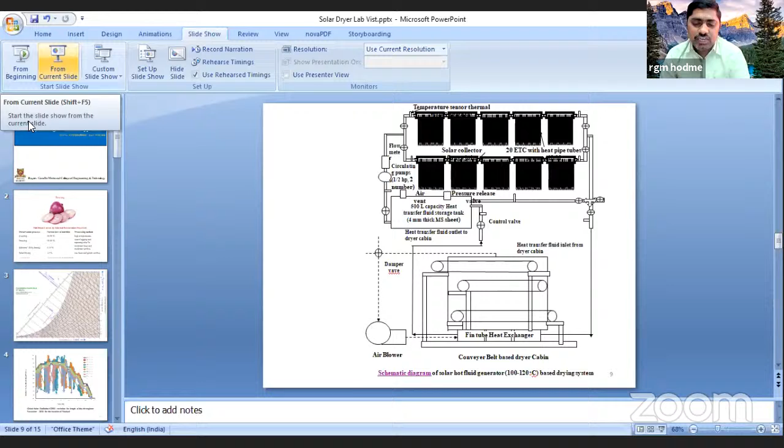I think this week I am coming fourth time. Last time we discussed sustainable development through renewable energy intervention, and one successfully implemented project. That project's virtual visit we planned today. Last Friday we did the virtual visit of our soya milk plant, and I think you enjoyed seeing it from seed to the cake. Today we will get the same experience, for the solar hot fluid generator based dryer for agro industrial application purpose.

I already explained this, but just brushing up before the virtual visit: what is the purpose of drying? We are removing the moisture for long-term storage. For long-term storage, we use two types of methods: one is cold storage, and the second is removal of moisture to reduce enzyme and bacterial activity.

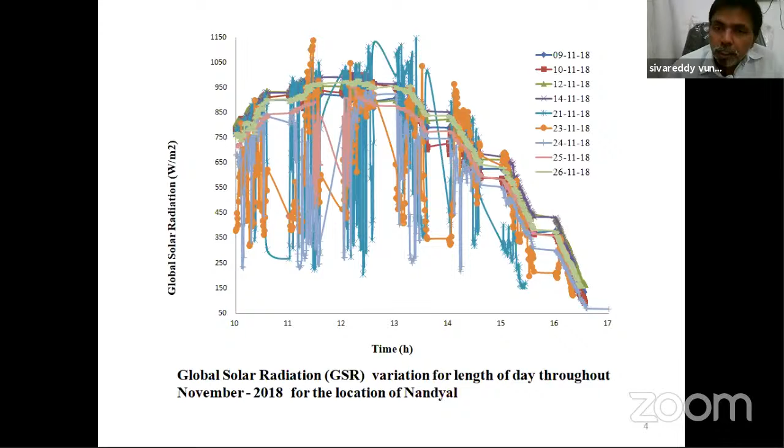In solar drying, in olden days—maybe the last 2000 years—we did only open sun drying, like drying chilies, dal, and paddy in open sun. But the drawback of open sun drying is the uncertainty of solar radiation, and it takes more time. Perishable goods can't be open sun dried—doing so causes color change and reduces product quality. For that, automatic drying is required. You can see these are the solar radiations.

For this, we developed and proposed one solar dryer. Here, three things we did. We separated the solar thermal unit separately, using ETC with heat pipe, so we used a separate industrial solar heating system total.

By ETC with heat pipe, we are heating the thermal oil, meaning the heat transfer fluid. The storage capacity we maintained is 500 liter storage capacity. So this is one cycle.

It is not linked with the dryer. Even though the dryer is not working, from early morning onwards we can store the solar energy. Next, whatever energy we are storing, that energy is used according to the need of the dryer.

Initial conditions require high airflow rate and low moisture air. At that time, the mass flow rate of the air can be increased by increasing the blower speed, and automatically the surface moisture is immediately removed in the dryer cabin.

You can see we selected a conveyor belt dryer cabin, not box type or cabin type dryer cabins, because this is a full-fledged industrial model. I will visualize that one later.

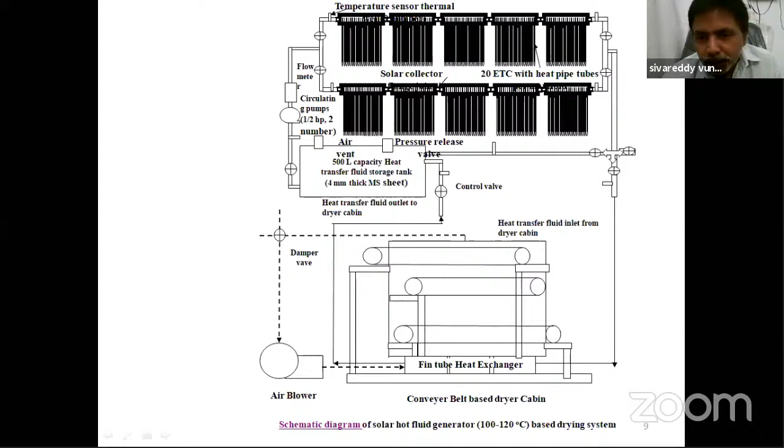Sir, are you playing the video? Video is not visible, sir. For you or all? I think for all. No sir, it is visualized, but it is not the shared video. Sir, it is clearly visible. Actually, I am also unable to see the video. The speakers are getting a problem. One minute. Now? I think participants are getting it or not. Yes sir, it is live, share mode only. Any participant respond - is the video visualized or not? Sir, it is clearly visible and audible. Okay, thank you, thank you. Video also, it's visible and audible. Sir, again you log in. No sir, no videos there - only that conveyor belt based dryer cabin paper, no videos there, only a schematic diagram of solar, that schematic diagram only is showing. Again I will share, one minute. You share the video, sir.

Now? Yeah, now it is okay. Yes, yes. Okay.

So this is the ETC. The two collectors were connected by the flange joint with neoprene rubber insulator. This is the tube. We are immersed in the glass tube. I think from starting again I will show what is heat pipe later. Otherwise, now this is the heat pipe. Heat pipe top portion is condenser. Total 1.8 meter length is the evaporator.

You can see. He will show. This is the heat pipe. Each ETC tube we immersed this heat pipe. This condenser portion is in the manifold, remaining in the ETC tube. I will show the ETC tubes now. This is the tube inner view. You can see two glass tubes we evacuated for increasing the absorbability.

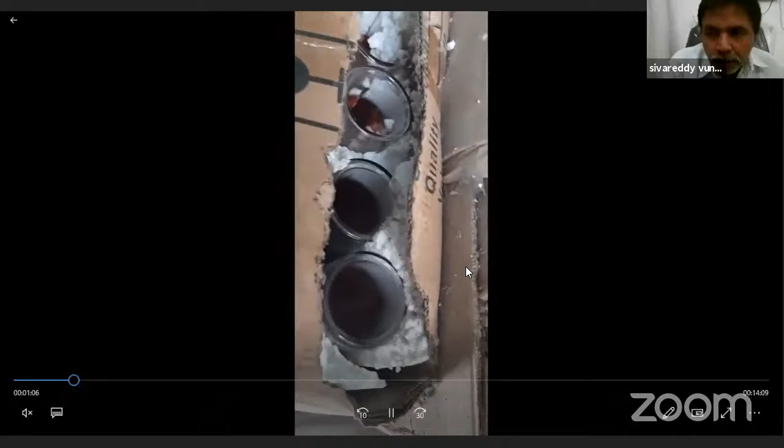Main advantage of heat pipe is to enhance the heat transfer at lower temperature difference also. That's why with the ETC tube itself, we are achieving more than 100 degrees temperature. Mediator is not water. Water at 100 means it will generate steam. Thermal oil we are using.

Now you see the structure. SS structure we are using, SS 304. Here also ground grouting we did for stability of the structure. You can see the foundation bolts for effective structural support. This is the manifold outlet.

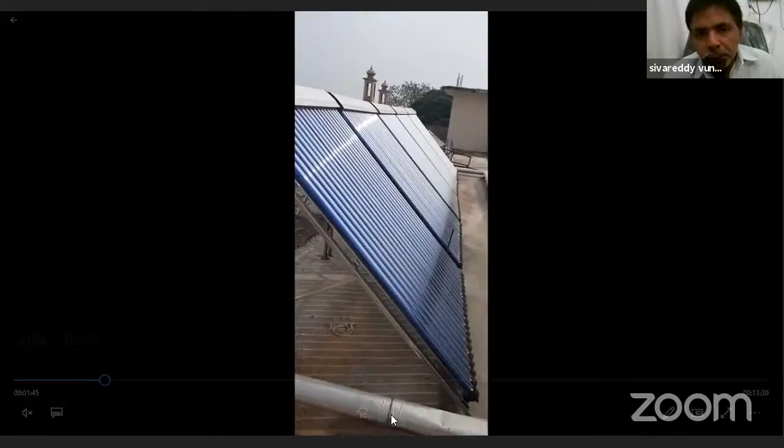Now you see this is the view of the ETC with heat pipe collectors. These are the 5 collectors. Each collector contains 20 tubes. Each tube length is 1.8 meter. Total area of the collector is 3.2 meters square. Like this, 5 collectors are connecting.

In the manifold, the heat pipe condenser part is there. Through the manifold only, heat transfer fluid is transferring. Each collector we joined by the flange joints. Everywhere we are using neoprene rubber. Why? Because neoprene rubber temperature resistance is more than 150 degrees. So best sealing effect we can achieve. This is the inlet of the collector. From the storage tank, we are getting the inlet.

This is one more view, one more development of solar wastewater evaporator. These are the remaining 5 collectors. So total 10 collectors. Each collector area is 3.2 meters square. So total 32 meters square area of solar collector is installed for drying of 200 kgs loading capacity dryer. Maximum capacity is 200 kgs.

So only through the manifold heat transfer fluid is transferring, nothing else. Remaining area only heat pipes are there. If due to the monkeys or any wind loads any collector is failed, there is no leakage, only temperature drop will take place. So this is the inlet pipe. You can see the deep visualization of the flange joint. You can see here we are immersing ETC tube.

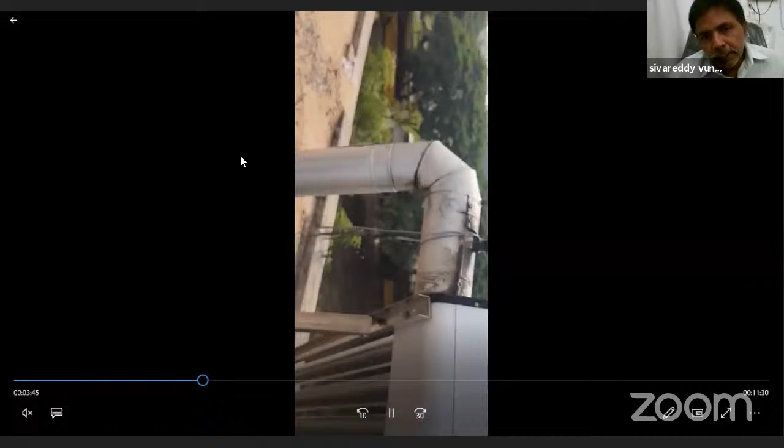This is the entire insulated manifold. Glass wool insulation we are using because high temperature is there. You see shading effect is coming. So this is the inlet pipe. For 2 collectors a single T-joint inlet we have given. This is the outlet of 2 collectors. This is from the inlet. So this is the outlet, one control valve we mentioned.

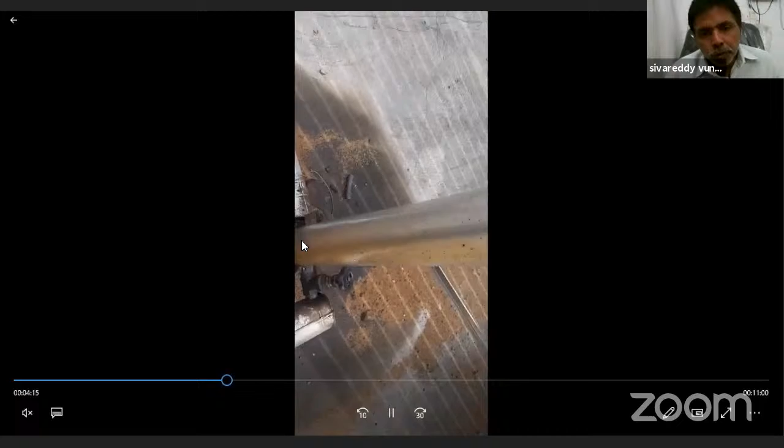If solar radiation is coming, and we want to directly utilize it, then we will open this valve. All valves are gate valves only. If I open this valve, it will directly go to the solar dryer unit. Solar dryer unit is available downstairs.

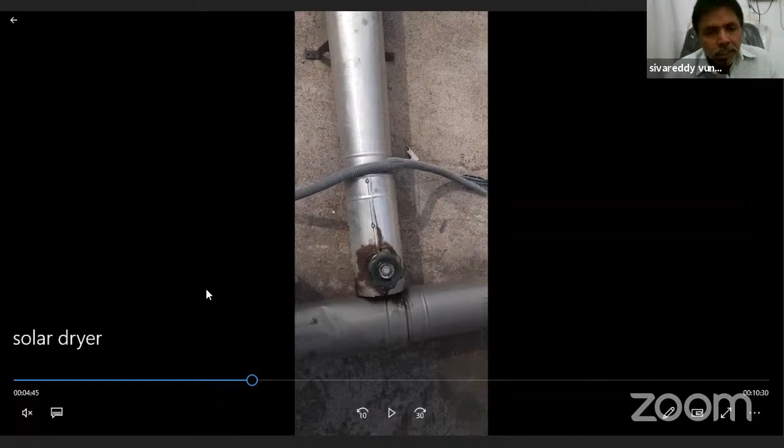If solar radiation is not available, then I will close the inlet valves of the collectors. Two collector inlet valves are there, I will close. Then whatever hot fluid is available in the tank will directly go to the solar dryer cabin. So when solar radiation is not available, my system will also run. This directly enters into the solar dryer unit.

Otherwise, if downstairs the requirement of heat is not available, then I will open this valve. I will close the solar dryer inlet valve. I will open this valve. Automatically, it will come to the storage tank. So three ways of connection by the gate valves we arranged.

So this is the inlet. Our second inlet is there. This is the flow rate measuring instrument. This is the outlet. One flow meter is there. If any problem is there with flow, I want to replace the flow meter, so two valves I connected. I will close the two valves and I will replace the flow meter if any damage is taking place.

This is the storage tank area, you can see. And these two circulating pumps are connected. One is standby, because if one pump fails, our system has to run. That's why we kept two circulating pumps. A common inlet and a separate inlet for each pump is there. Whichever pump I want to use, I will open that inlet valve. The other inlet valve I will close.

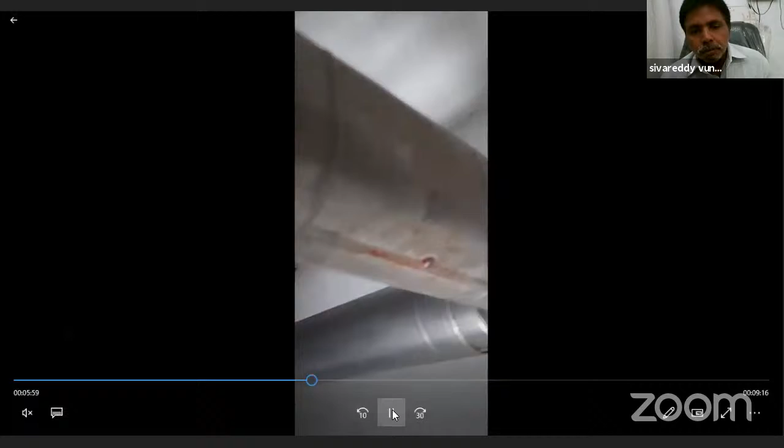You can see here two inlets are there, one outlet. One inlet is coming directly from the collector. Another inlet is from the dryer cabin, where recirculated heat transfer fluid is coming. So the storage tank contains two inlets and one outlet. So with one circulating pump, we are capable of doing all three operations.

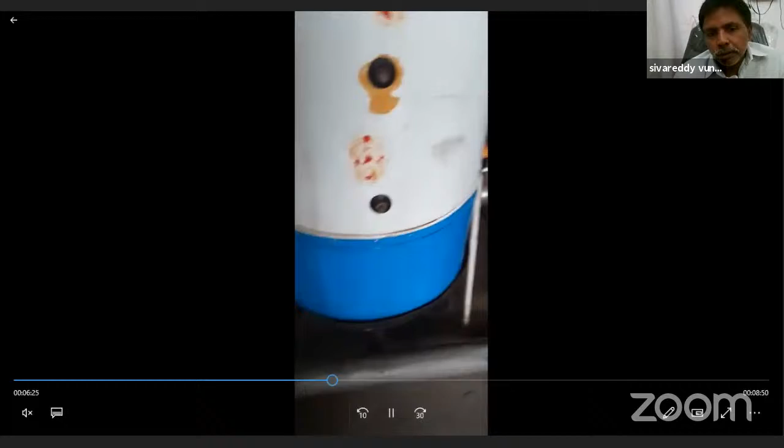This is the inlet from the dryer cabin, whatever inlet is coming. Inlet we kept at the top, outlet we kept at the bottom. This is a common criterion. There is no special principle.

Then this is the control board for running the blower, temperature measurement and circulating pumps. And for the blower, a variable drive blower we connected, so we can increase the blower speed. Now the blower is running, so you can see the suction. This is the outlet of the blower. From the blower, air is circulating inside the dryer cabin. Again from the dryer cabin we will get the same air, or by using the damper arrangement, fresh air also we can get. I will show the damper arrangement.

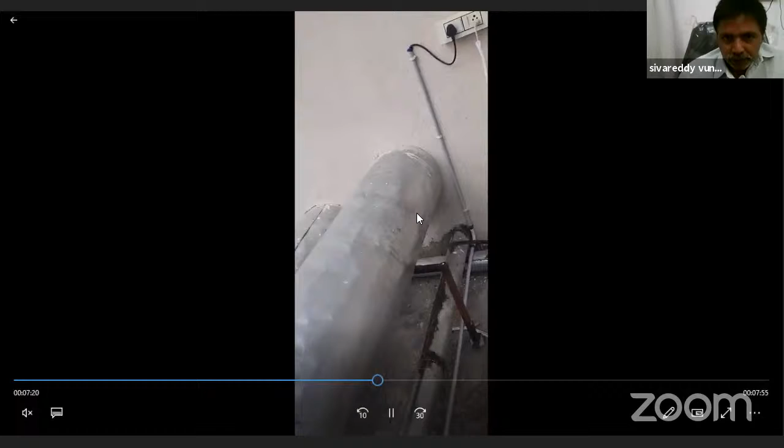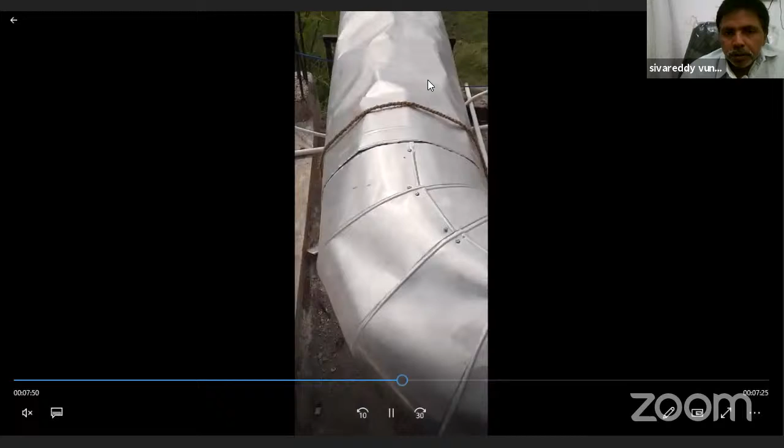Yes, this is the outlet of the blower. This is the inlet of the blower. Two things. So from this blower outlet, this duct is directly entering into the dryer cabin. The dryer cabin I will show; it is on the first floor. From the dryer cabin, we are getting the outlet.

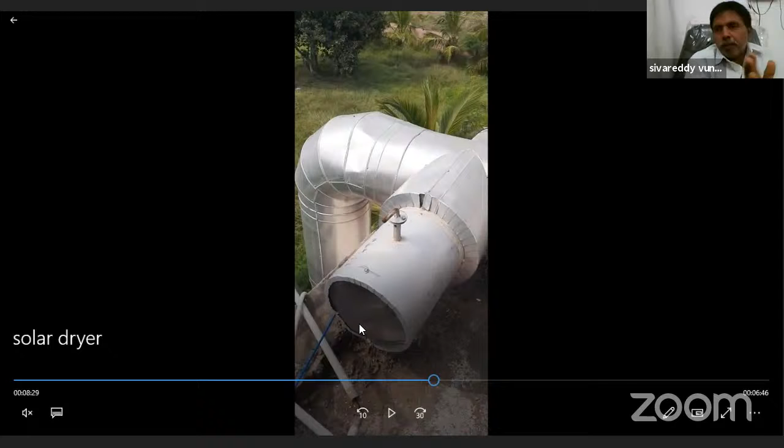This is the dryer cabin outlet. If the relative humidity is high, you can see, I will open this damper and automatically the exhaust air will go to the ambient. If the relative humidity is low, less than 60%, then I will close this damper and I will open the intermediate damper. The same air I can recirculate.

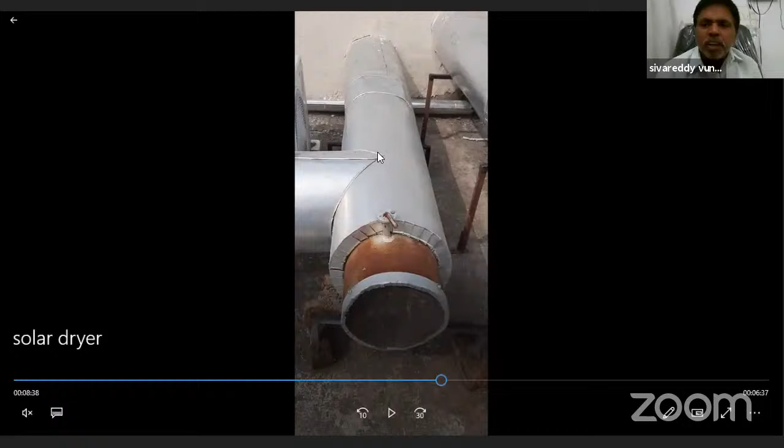This is the inlet. I will close this inlet damper. If I want to substitute some fresh air, I will partially open this inlet damper. So some fresh air will also enter into the dryer cabin. Already used air we can also recirculate. That means effective utilization of heat energy.

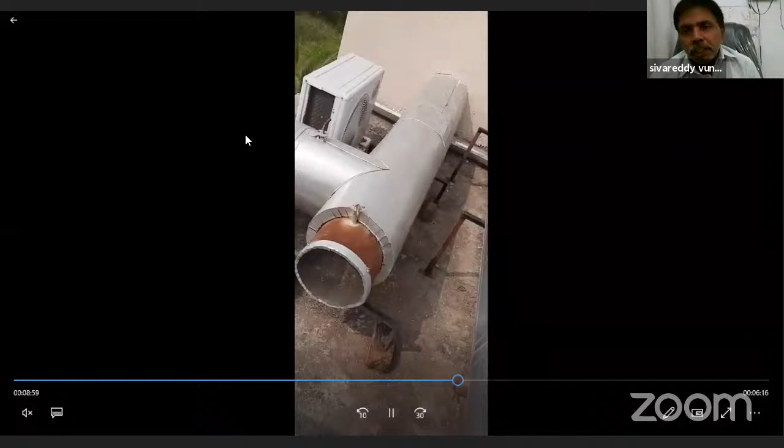So due to the damper opening and closing conditions, I can use three-way systems. If relative humidity is low, I will use recycling of the air; or if I want to substitute some fresh air, I will use partial opening of the inlet damper; or in the initial condition, when the relative humidity of the air is high, I will release the total air to the ambient, and every time I will take a fresh charge.

So for circulating the fluids, three methods we used. For circulating the air also we used them. Because of this separation, we are storing more energy. The efficiency of the system is enhanced, and the drying time of the solar dryer in non-solar hours is also increased.

Now coming to the dryer cabin section, this is the inlet duct. It is connected. Hot fluid is entering into the dryer cabin. In the dryer cabin, on the downside, we connected radiators. I will show you. Three radiators we connected. So the inlet duct is there. Three inlets we arranged. Why? Because we are using three radiators. I will show the radiators.

You can see, yes, these are the three radiators. In the radiators we are circulating hot fluid, and air flowing through the fins will gain the heat. For visualizing how drying is taking place in the dryer cabin, we also arranged one glass window.

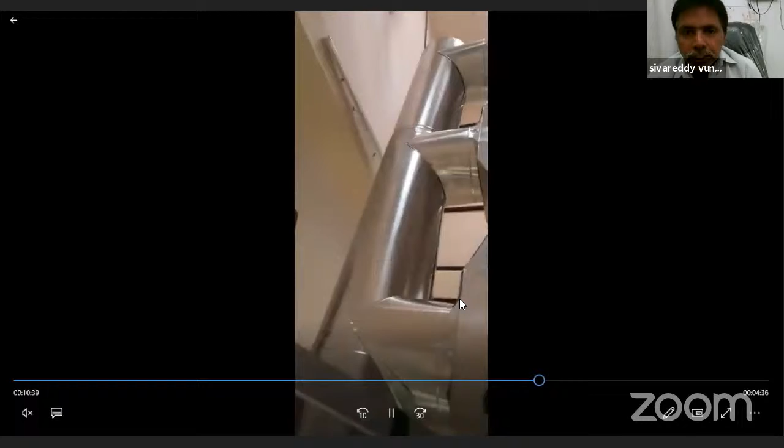Now on this side you can see the inlet duct coming from the top floor. For each dryer cabin, this is the outlet duct. The outlet duct again goes to the blower inlet. From here we are doing the loading. This is a 3-layer conveyor belt dryer.

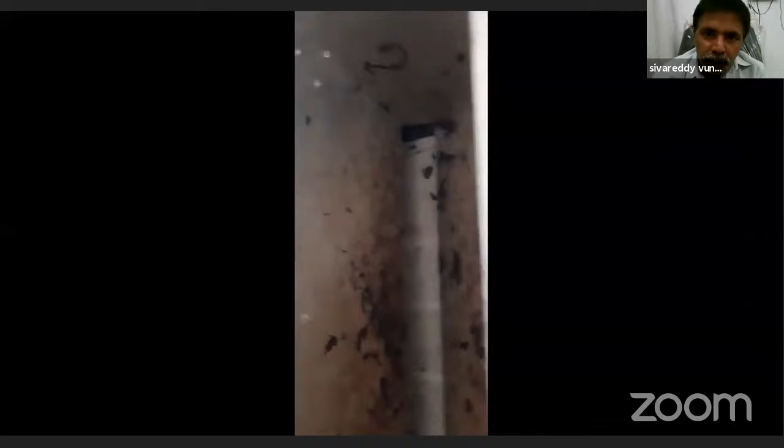Recently we did onion drying. Our employees did not clean properly. The leftover onion is melted. You can see the leftover onion, whatever is there. With continuous operation of the system, it is melted.

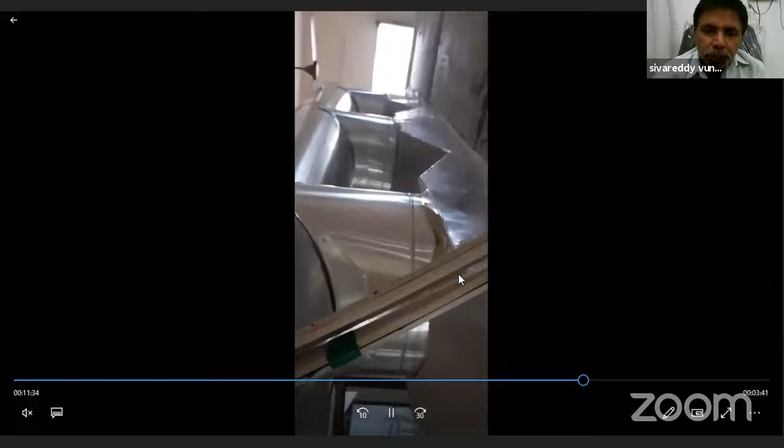For measurement of the temperatures and flow rates, the sensor connection is there. The instrumentation I will explain later. Today I am only explaining the dryer unit. This is my lab. The outlet of the hot fluid again enters at the top side. One is inlet, one is outlet.

You can see, inside my lab I directly placed this one. Everything we connected. Because we will not get special areas in an education institute. That is the main problem. Area is the most precious thing for an education institute. So whatever was available in my lab, I utilized to the maximum percentage.

This is the outlet. At the top side we are doing the inlet. The conveyor belt has 3 layers. Finally the third layer will get the outlet. The movement of the belt is taking place. You can visualize this one. The movement of the conveyor belt.

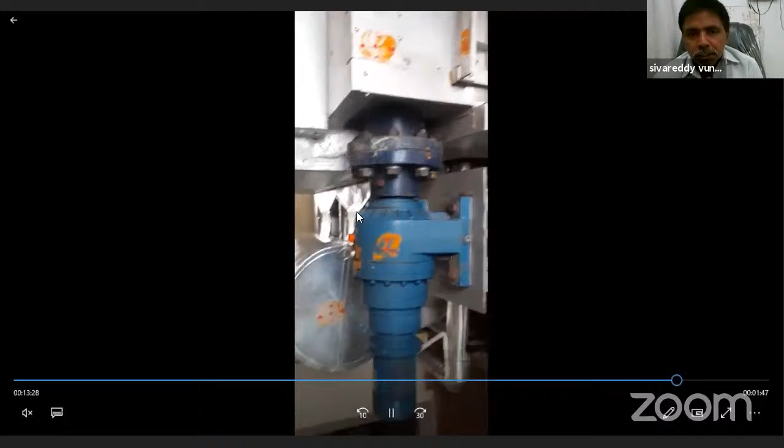And for washing of the agriculture produce before drying, this is the washing area. A separate washing area is also placed. Now my supporting staff suggested you can visualize it from the top view also. Once again, you can see the movement of the conveyor belt taking place.

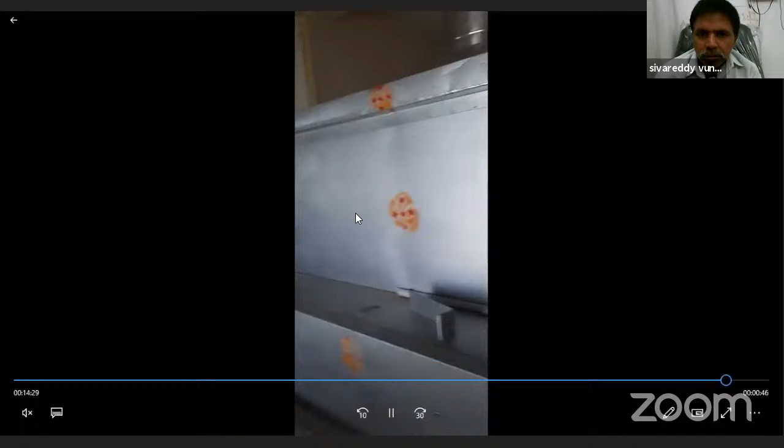This white jolly cloth, cotton cloth, we used because that is a metal conveyor. From the side angle also, you can see the movement of the conveyor belt. Yes, you can see. This is the conveyor belt system.

Total movement from top load to down load will take 2 hours time. So the first drying, the entire surface drying, 50% of the moisture we can remove in one rotation. In the second loading, we will stop the conveyor belt after full load, and for at least 1 hour we recirculate the hot air. Later again, we will remove the surface moisture.

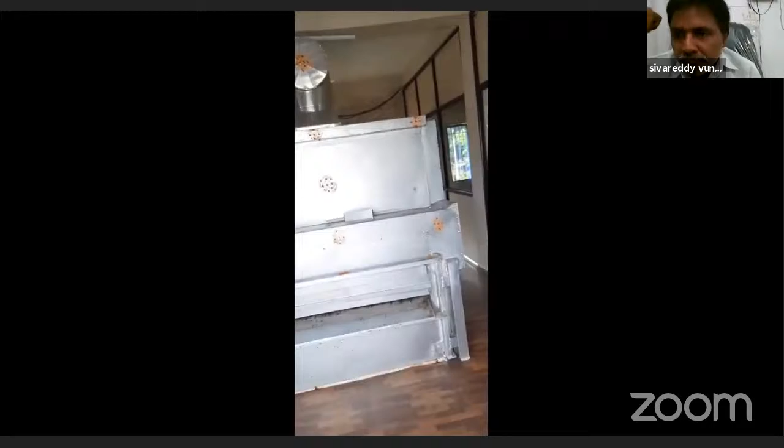For drying of onion and tomato, it is taking at least 7 hours time. For leafy products, in the first batch, first round, meaning within 2 hours, full-fledged drying is taking place. I think this is clear. This is the virtual lab visit of the system. I think you people have somewhat visualized it.

I already showed some onions. This is the dryer cabin drying. Temperatures inside the dryer cabin we achieved according to our need. Based on the product, we have to change the inside temperatures. For onion, for effective drying, if we kept the onion directly, even after 3 days it will not dry.

We have to increase the surface area. To create the capillary action, we can't create it at 2 feet depth. Only at a small depth can we create the capillary action by the movement of hot air on the surface. So for that, we separately purchased an onion slicing machine for drying of the onion. After drying, we also showed the cost economics.

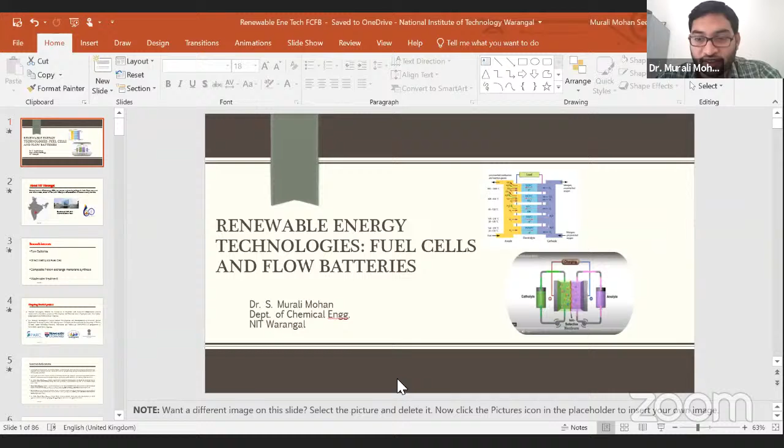So this is renewable energy, as the FDP is focused on renewable energy technologies. So this is my research. I do research in fuel cells and flow batteries. So I'm connecting these fuel cells and flow batteries to renewable energy. How are they connected actually? Many people think that renewable energies are solar, wind, tidal and these are all. But fuel cells and flow batteries are also part of renewable energy. So as you can see,

Okay. So coming to my institute, it is NIT Warangal. This is one of the premier engineering colleges among the NITs. We know that there are 31 NITs in India, 15 are old, 16 are newly established. NIT Warangal is very old. It was previously known as REC Warangal. From 2004 onwards, it is known as NIT Warangal. It is considered one of the best among the NITs. It was established in 1959, and last year we celebrated our 60th Diamond Jubilee year. For 61 years, we have been giving technical education to our country.

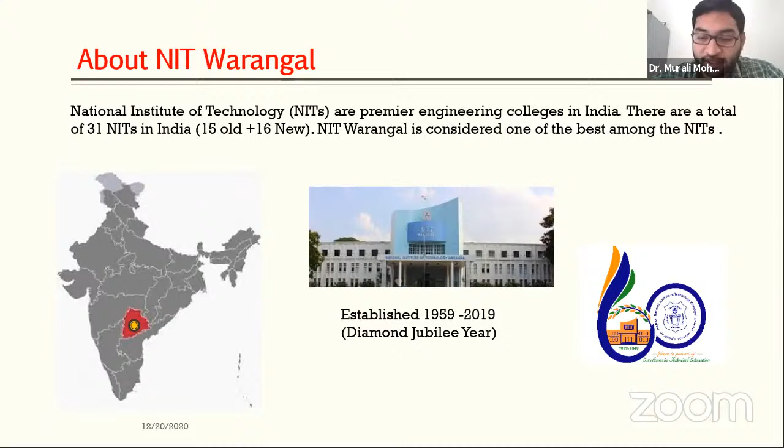I am very proud to be one of the faculty here in the Department of Chemical Engineering, NIT Warangal. And these are my research interests. I work in flow batteries and direct methanol fuel cells. In this field, I produced one PhD recently, in direct methanol fuel cells. And as Professor Sivareddy mentioned, I make membranes for these fuel cells and flow batteries. I am also involved in wastewater treatment.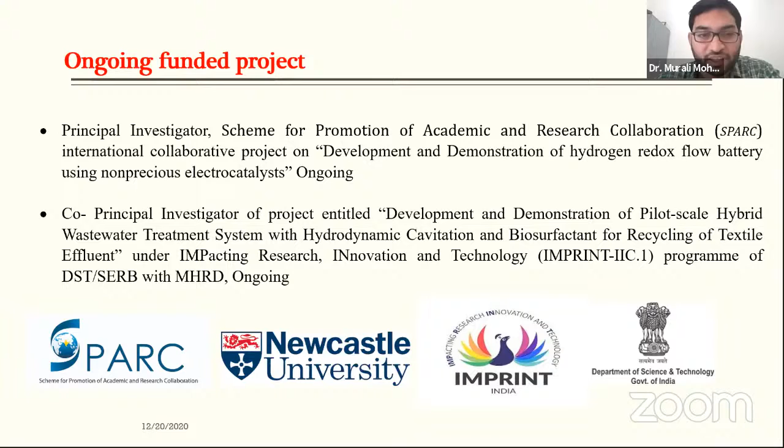So these are my ongoing funded projects. I am principal investigator for this SPARC project. It is an international collaborative project with Newcastle University, UK. And I am also co-investigator of one IMPRINT project, which is an industrial collaboration, named hybrid wastewater treatment systems with hydrodynamic cavitation and biosurfactant for recycling of textile effluent. We collaborated with a textile industry near NIT Warangal. These are the two projects currently running, but because of COVID, these were also affected a lot.

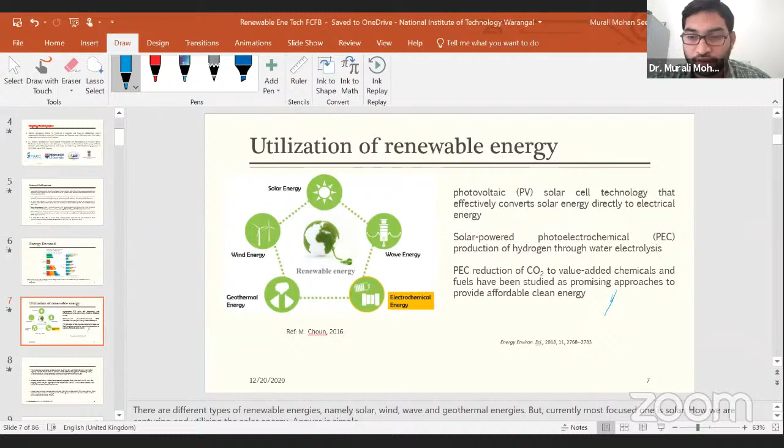Okay. So coming to the utilization of renewable energy, we know solar energy, wind energy, wave energy, geothermal energy, and I include in this cycle electrochemical energy, the batteries and fuel cells. So how do we utilize renewable energy? We use photovoltaic cells, solar cells, that convert solar energy directly to electrical energy, and solar-powered photoelectrochemical cells, production of hydrogen through water electrolysis. So hydrogen is one more renewable energy. We use the hydrogen to generate electricity through a fuel cell. In that way, electrochemical energy conversion and storage come into the picture in renewable energies.

So photoelectrochemical reduction of CO2 to value-added chemicals. More CO2 is being produced, so if you can convert the CO2 to value-added chemicals, that is also one good research area, and it also helps provide affordable clean energy. So in this way our electrochemical energy is linked with renewable energy. In electrochemical energy we are mainly talking about electrochemical energy generation, that is the fuel cell, and electrochemical energy storage, that is the flow battery. These two topics I am covering in today's lecture.

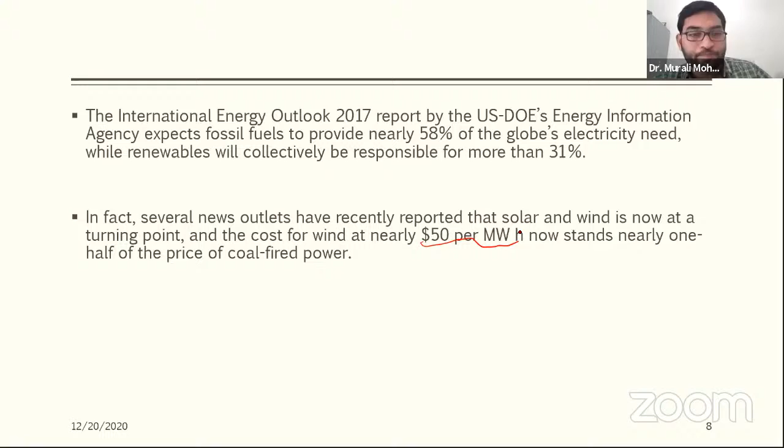In fact, several news outlets have recently reported that solar and wind energy are now at a turning point and cost nearly $50 per megawatt hour, nearly one-half of the price of coal-fired power, but still the technologies should be improved and the cost should come down for every residential use. First, we will replace with renewable energies at an industrial level, then it comes to the domestic. So how can we do that? Large-scale energy storage technologies are also a bottleneck. Their rapid development and deployment is critically important in order to realize clean and sustainable energy in the future. Okay.

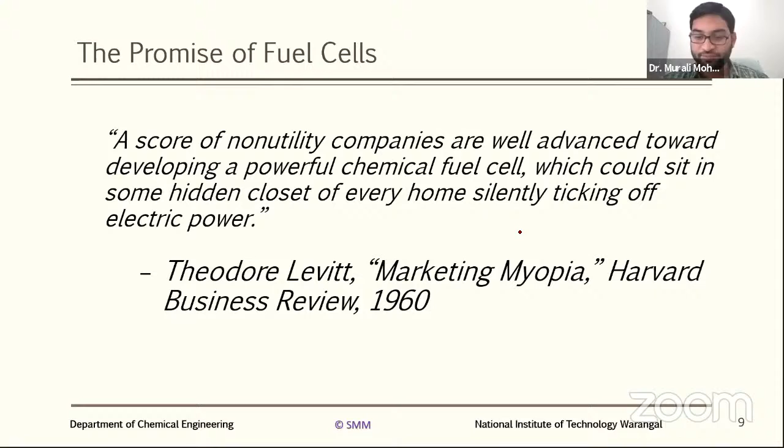So what is a fuel cell? Why is it necessary? I already told you, the same reason. Fossil fuels are limited in amount, sooner or later they will be depleted, and the second reason is they are causing serious environmental problems through the burning of fuels.

And so early in the 1970s, the hydrogen energy system was proposed as a solution for these two interconnected global problems. Okay, so what is fuel cell?

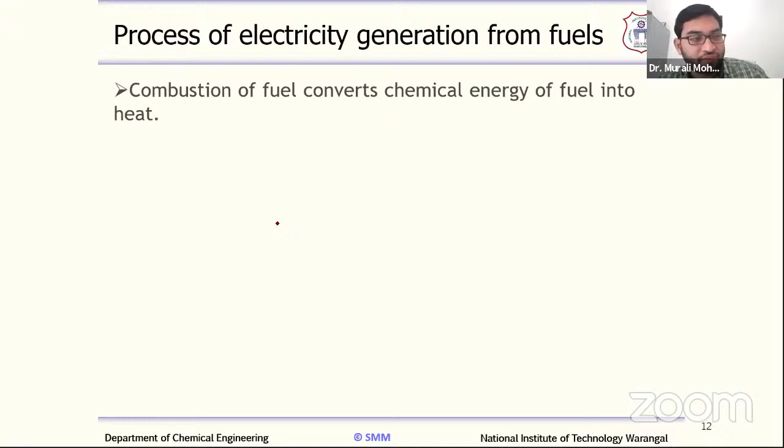So this is the conventional process of electricity generation from fuels. How are we doing that? We are burning the fuel, converting the chemical energy of the fuel into heat first. That heat is then used to boil water and generate steam, and that steam is used to run the turbine, which converts thermal energy into mechanical energy. Then finally mechanical energy is used to run the generator which generates electricity.

This is the conventional process of generating electricity, but with the fuel cell we can avoid all these steps, and in a single step we can produce electricity directly. This simplicity is what attracts most researchers to this technology, so we are going towards that, and above all, this is renewable energy. First, how are we producing electricity conventionally - from fossil fuels - and this is from renewable energy.

So this is Francis Thomas Bacon. He is a scientist from 1904 to 1992 and began researching alkali electrolyte fuel cells. There are many types of fuel cells, and I will explain all the types. He worked on this in the introduction part, so I am using just this as the history of the fuel cell. He used the alkali type of electrolyte in fuel cells in the 1930s.

In 1939, he built a cell that used nickel gauze electrodes and operated under high pressure - that is very risky, it operated at 3000 psi. In 1958, he demonstrated an alkali fuel cell using a stack of 10-inch diameter electrodes for Britain's National Research Development Corporation.

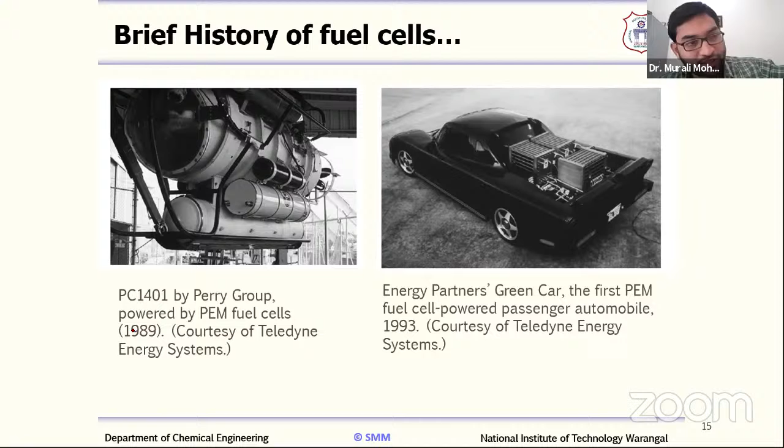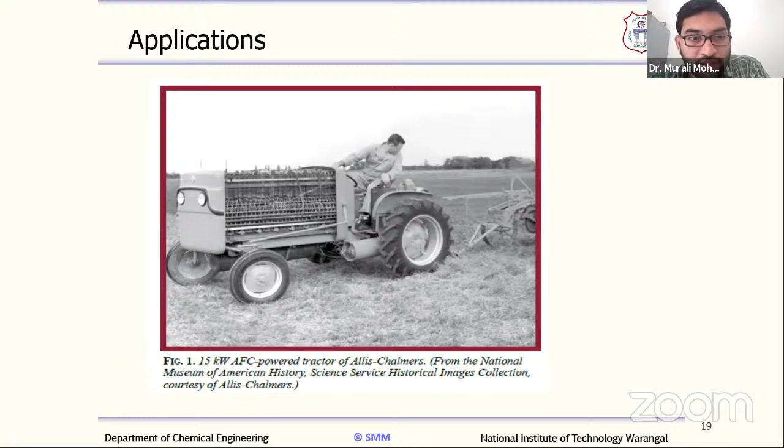And you can see this fuel cell park in Hwasung City, South Korea. So you can see this is clean. Any industry, if you go, is not that clean, but when you see the fuel cell, it is clean by itself.

We are using hydrogen and oxygen only and producing electricity. There are no moving parts - the advantages I will explain. How advantage of the fuel cell, what are the advantages, and only a few disadvantages are there - those are also being explained.

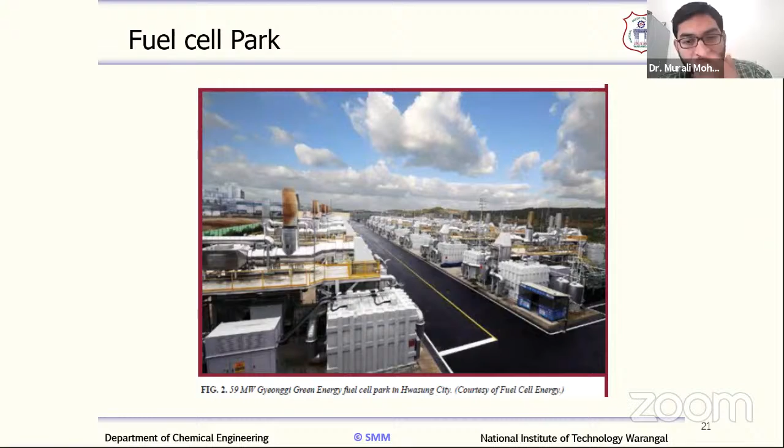You can see your laptop or your cell phone - they are not making any noise, right? So they are very quiet. These electrochemical devices are quiet, and they deliver energy also at the same time.

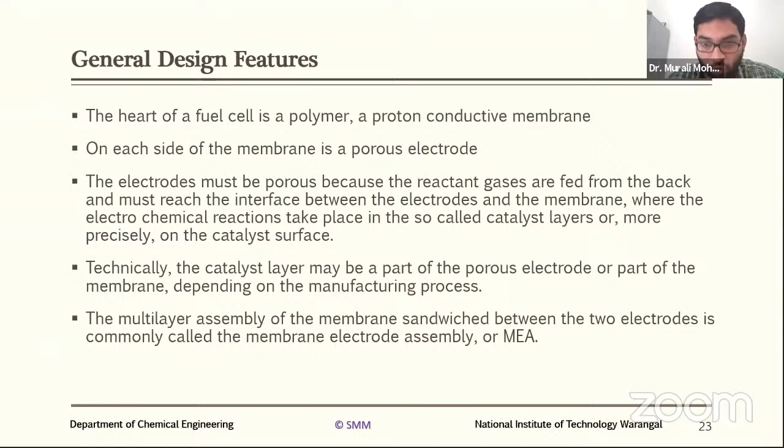If you remove this membrane, then anode and cathode will merge together and you cannot experience any production of electricity here. So membrane electrode assembly consists of catalyst layer, gas diffusion layer, and proton exchange membrane. The whole unit is no thicker than a few hundred microns. I have shown you it a little bit thicker to explain, but it is not very much thicker. This is micron size thick, and it can produce power density up to 1 watt per centimeter square.

6th is water transport, 7th is also water transport, 8th is two-phase flow, unused gas carrying water droplets. 9th is heat transfer. These are the different processes happening at a time in the fuel cell.

Simultaneously, so when I show you the video, you can see all these processes, what happens inside the fuel cell. These are the processes. I just showed you the figure.

Same thing. Gas flows to the channels first, and it reaches the porous channels. Then it flows through the gas diffusion layer. Then it goes to the interface of the catalyst and polymer electrolyte membrane. Then there is a reaction.

Proton is produced. The proton is transported from the anode to cathode, and proton and electron are produced at the anode. The electron goes to the external circuit. Proton goes to the internal circuit.

So proton is transported through the polymer electrolyte membrane. Electron is transported to the external circuit. Then at cathode, water is generated.

I'll show you the chemical reaction. Then water transport also happens from the anode to cathode, and water is the outlet, byproduct, along with heat and water. That is a schematic which I showed in the earlier slide. So we are putting the hydrogen, oxygen, and we are generating the electricity, and the other products we are producing are water and heat.

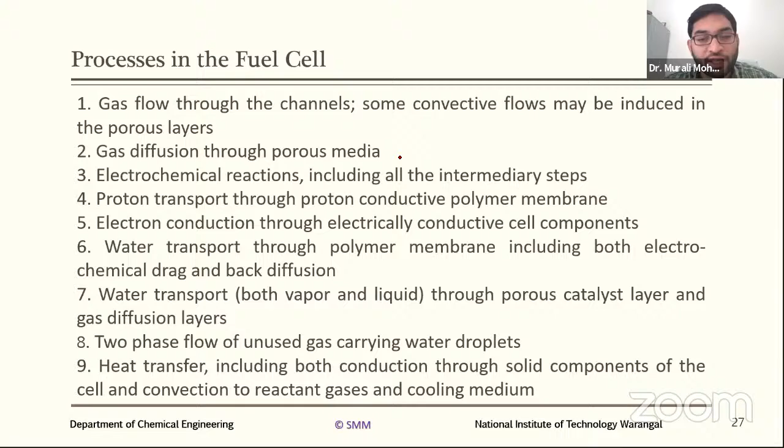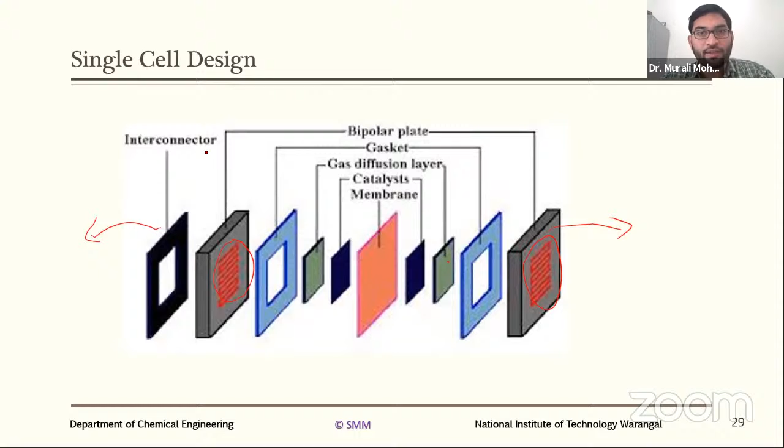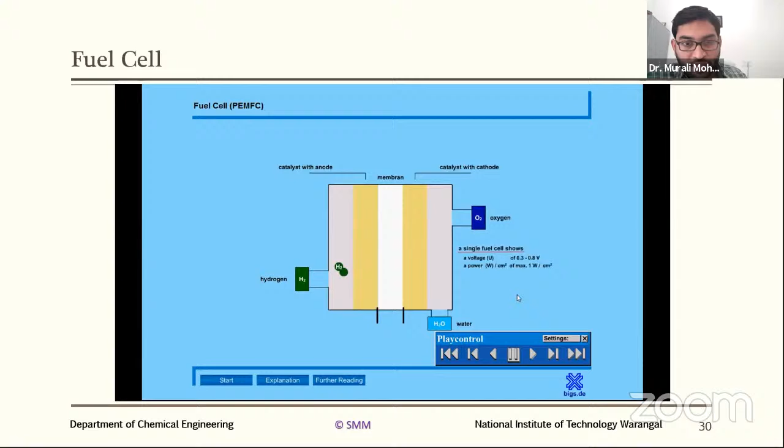You can see I explained it as a schematic. Hydrogen and oxygen. Hydrogen is entered at the anode side. Oxygen is entered at the cathode side. The membrane is dividing both anode and cathode, and hydrogen we are pumping in, and at the cathode side oxygen we pump inside the fuel cell. Then the reaction is happening at anode and cathode simultaneously, and the electron is produced at the anode side, and H plus is transported from anode to cathode.

See this, and hydrogen is mixed with oxygen and produces water and some heat. Okay. At the same time, electrons are captured at the external circuit. This is a small explanation also. Again, we don't need it.

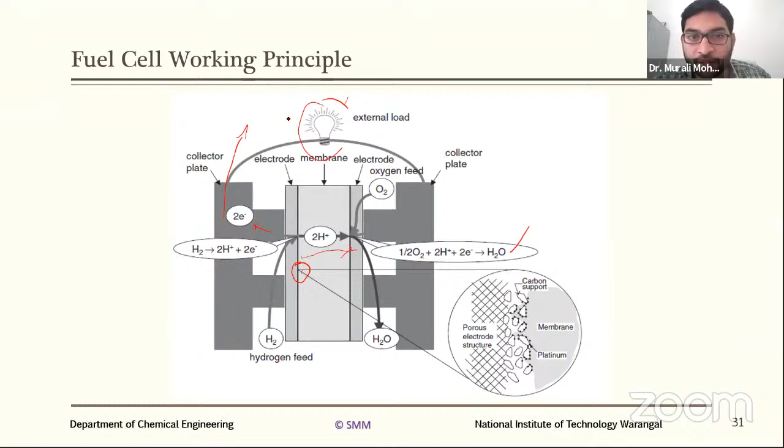Only there the reaction is happening, and the electron is transported there, because it is a conductive material, a current collector. It goes on to that. From there we are connecting with the other electrode, so the electron automatically passes through this circuit, and in between we can extract our electricity. Okay.

So these are the few half-cell reactions. When H plus is transported through the membrane, then you can see these reactions. The overall reaction is H2 plus half O2 gives H2O, and it also depends on the electrolyte which we are using in the fuel cell. If you use the polymer electrolyte, these are the reactions. This is also called acidic electrolyte.

If you use a base, KOH, alkaline fuel cells, then OH minus is transported through the membrane, and there we have the molten carbonate fuel cell. There CO3 2 minus is transported through the membrane, and in solid oxide fuel cells O2 minus is transported through the membrane. Based on the electrolyte, fuel cells are divided into different types.

So here are the half-cell reactions, I will explain that. When you use the different fuel cells, these are the different half-cell reactions. The overall reaction is the same. Hydrogen is reacting with oxygen and producing H2O. Okay, and when this reaction is happening, we are also producing the electricity.

Okay, why is hydrogen used? It is highly reactive when suitable catalysts are used. It can be produced from hydrocarbons. It can be produced from water electrolysis. Hydrogen also has very high energy density. It can be stored for closed environment applications like space also. It can be carried easily.

So these are the classifications of the fuel cells based on the electrolyte which we use in the fuel cell. Fuel cells are classified as alkaline fuel cells, in short AFC. And this is the proton exchange membrane fuel cell or polymer electrolyte membrane fuel cell. You can use either of the names for PEMFC. These are the most pioneered fuel cells in the fuel cell category.

Okay, and direct methanol fuel cell, phosphoric acid fuel cell, molten carbonate fuel cell, and solid oxide fuel cell. So you can see this classification, and as I told you, in PEMFC, H plus is conducted from the anode to cathode, and in the alkaline fuel cell, OH minus is transported from cathode to anode, and in the molten carbonate fuel cell CO3 2 minus is transferred from cathode to anode, and in SOFC, solid oxide fuel cell, O2 minus is transferred from the cathode to anode.

Okay, to see these cell reactions: in the solid oxide fuel cell case, O2 minus is coming from the cathode, and it is reacted with the hydrogen at the anode, producing water and 2 electrons. At the cathode side, O2 is reacting with 4 electrons and producing this O2 minus. That O2 minus is reacting with hydrogen. The first reaction is taking place at the cathode, and the second reaction is taking place at the anode.

Okay, reduction is taking place and O2 is converting into the O2 minus ion, and that O2 minus is transported from cathode to anode, reacting with the hydrogen and producing water and electricity. Then in the alkaline fuel cell case, the reaction is initiated at the cathode first and OH minus is produced. That OH minus travels through the membrane, reacts with hydrogen and produces water and

electricity. And in the molten carbonate fuel cell, CO3 2 minus is produced at the cathode. That CO3 2 minus reacts with hydrogen and produces water and electricity. In either case, if you see the overall reaction, hydrogen is reacting with oxygen and producing water and electricity.

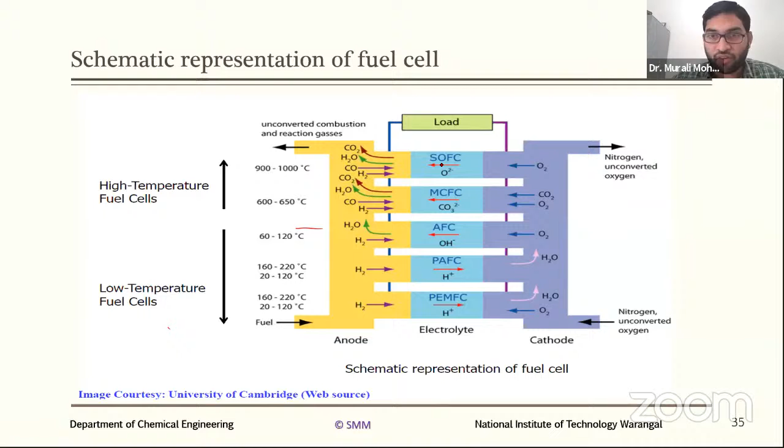For portable applications, these low temperature fuel cells are suitable, and for distributed power generation, not domestic, not portable, the stationary applications, the solid oxide fuel cells and molten carbonate fuel cells are suitable. They need internal reforming of methane to produce the hydrogen. Any questions at this point?

I had some voice, so I was asking. If not, I will continue. From the participant side, if you have any doubts regarding fuel cells, you can ask. No, sir, carry on. Anyway, I'll take the question and answer session at the end. Is it fine with participants? No problem for me to answer questions at this point also. You can put your question in the chat box also. Here I cannot see the chat box. I request Shivareddy to read the question if there is any. Till now there is no question, sir. Okay, then at the end we'll take the question and answer session. Thank you.

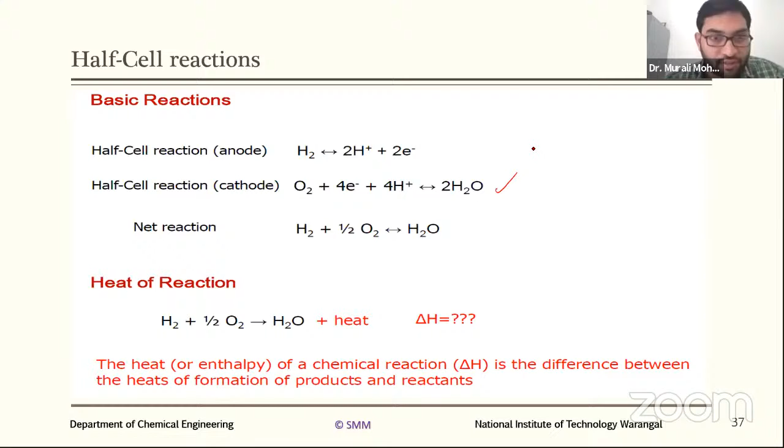So delta H is calculated like this: H products minus H reactants. In the fuel cell case, the product is water and the reactants are hydrogen and oxygen. The enthalpy associated with water at 25 degrees C is minus 286 kilojoule per mole, but it is 0 for elements.

Elements have 0 enthalpy associated with them. When the elements combine with some other molecule, then it will have enthalpy. Okay, so as elements, they don't possess any enthalpy. So these hydrogen and oxygen are elemental.

Because those will have zero enthalpy, and only here the product is water, and it has an enthalpy of minus 286 kilojoules per mole. Here heat is produced, which means it is an exothermic reaction. When heat is taken to run the reaction, that is called an endothermic reaction. When there is no net heat loss or gain, delta H is 0. We call that a neutral reaction.

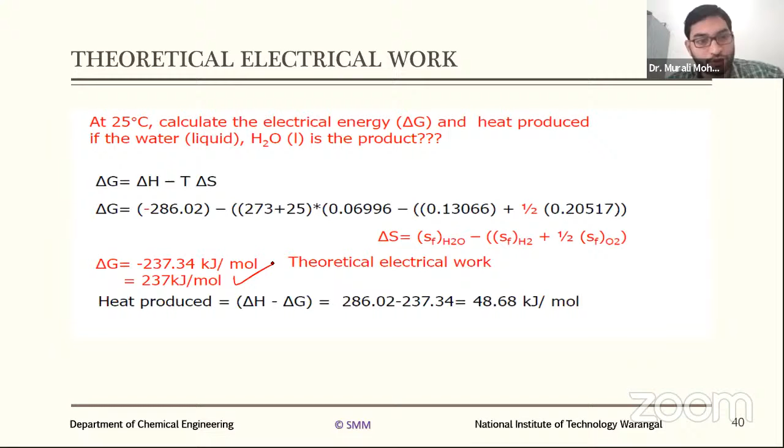So generally, how do we calculate the cell potential of the fuel cell? Hydrogen is giving 2 electrons, oxygen is reacting with these 4 electrons and giving H2O. This is the overall reaction. The electrical work is defined as Q into E. What is Q? It is a charge, in coulombs per mole, and this is the specific electrical work, joules per mole. Why per mole? Because we are giving the chemical energy.

Sir, sorry for the interruption. Yes, Prasanna Kumar is asking something. I need some information about the effect of membrane shrinkage on the performance of a proton exchange membrane fuel cell.

Yes, Prasanna. We have discussed the role of the membrane. Shrinkage of the membrane depends on the material we use for synthesis of the membrane. When the membrane is not that thermally stable, or because of the chemicals used in the fuel cell, the membrane will fail. The membrane will shrink, or it may expand, or it may fail. There are problems associated with the membrane.

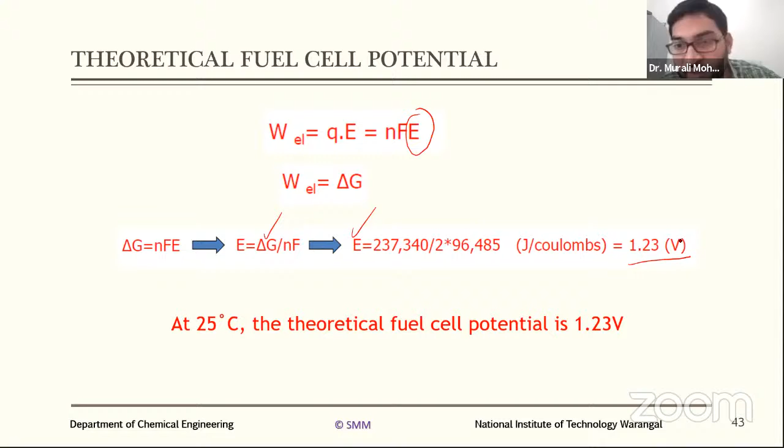But there are losses. If you measure the voltage between these two electrodes, you cannot actually see 1.23 volts. Even when there is no load connected, there are still losses in the fuel cell. What are the losses involved in the fuel cell? This is explained with the polarization curve.

What is polarization? This is the dictionary meaning I am giving: a division into two sharply contrasting groups or sets of opinions or beliefs. Means there are two sets, like here current and voltage. So these are the two different sets. With these two sets, we are explaining the performance of the fuel cell. Because of that, it is called the polarization curve. It is one of the most common methods for testing the fuel cell. How does it look? I will show the polarization curve also.

The polarization curve displays the voltage output of the fuel cell for a given current density and loading. The fuel cell is generating some electricity. What is the rate at which we are extracting that electricity? Means what is the current density we are taking out, per centimeter square? Or per centimeter square, how much power we are taking out? That is the energy density or power density we are talking about.

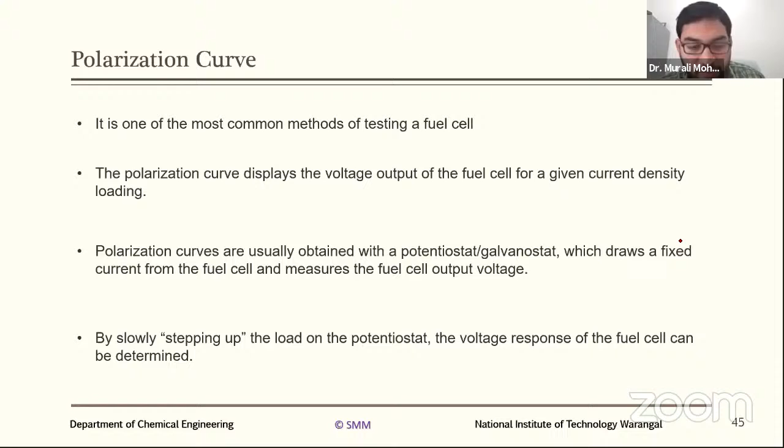So, what are the voltage losses in the fuel cell? These are the losses: kinetic losses, internal electrical resistance losses, difficulty in getting the reactants to the reaction sites, internal currents, and crossover losses. These are all explained here. Polarization loss. So these are the losses.

This is the theoretical voltage which we calculated, 1.18 volts. But that voltage cannot be seen in the fuel cell because of these losses. There is an open circuit voltage loss caused by mixed potential and crossover. Crossover means one of the reactants is escaping from one half cell to the other half cell, which should not be. The membrane has to restrict the passage of that particular ion, but it is not a 100% ideal membrane. So some ions may escape from one half cell to another. Because of that, this loss happens.

And there is the activation polarization loss. You have to activate that; minimum energy is required. Activation means the minimum energy required to initiate the reaction, and the reactant has to come to the site, and the reaction has to be initiated.

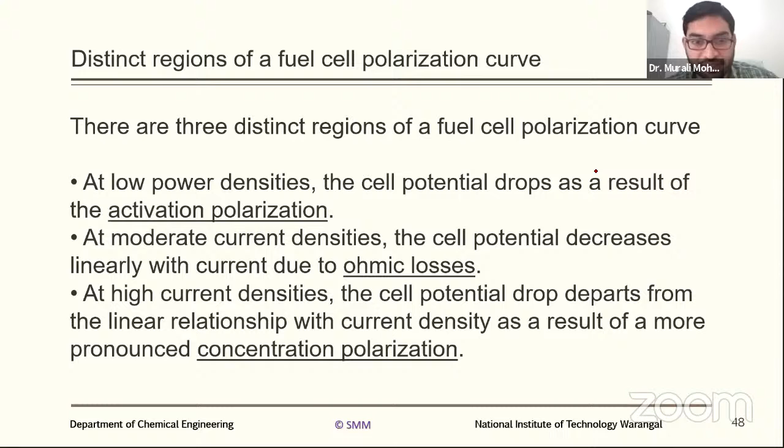Next segment is flow batteries, a little bit. I'll explain, not in that much detail, but already we spent a lot of time, maybe 1 hour, I think.

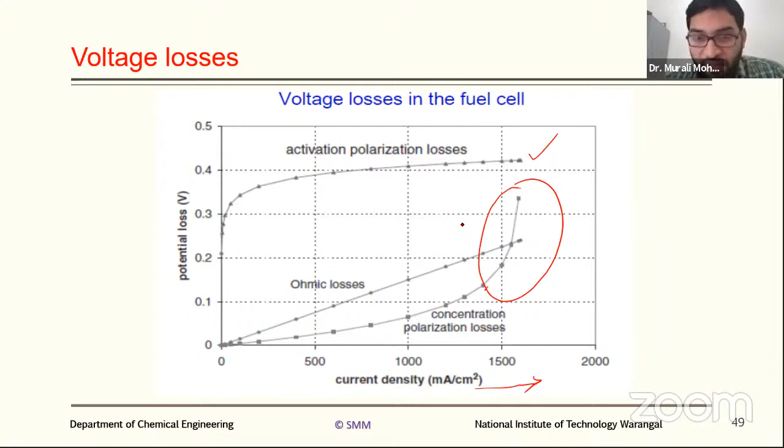Shall I give a break of 5 minutes, or shall I continue? There are not more slides. I can continue. Yes, you can continue, Murali. You may take 15 to 20 minutes, then leave time for doubts. Okay, so question and answer session. Prasanna Kumar wants to ask one more question. Prasanna Kumar, please unmute yourself and ask. Yes, sir.

So in hydrogen fuel cells, is there any hydrogen production by water electrolysis, sir? Hydrogen is not produced in the fuel cell. Hydrogen is produced outside of the fuel cell. It takes place in methane reforming in the refineries; you can see hydrogen production units. They are also using renewable energies for production of hydrogen. Whatever energy is required for hydrogen production, that is a different area. It is not included in the fuel cell.

We are not touching that part, but hydrogen can be produced from water electrolysis, and renewable solar energy can be used for running that water electrolysis. This is an upcoming field: water electrolysis using solar. Water electrolysis requires a lot of energy. If we can supply that energy from solar, it is a very attractive feature for producing hydrogen and interconnecting the fuel cell with that hydrogen infrastructure.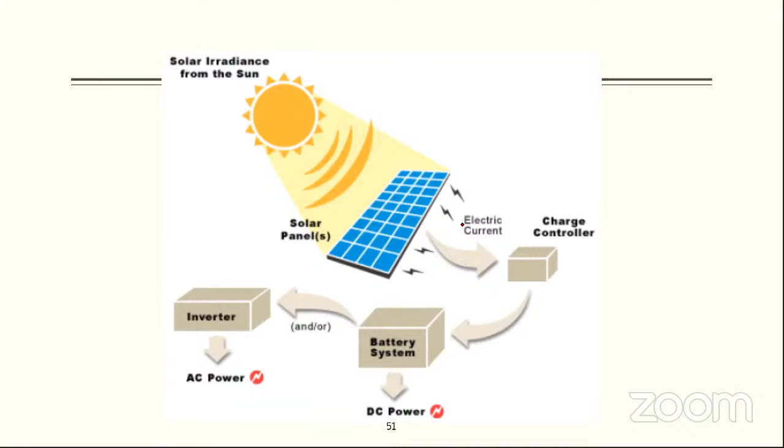This is the traditional generation or renewable energy generation. Whatever the excess generation or excess demand, the bridge is electrical energy storage. So from here we can divert the energy to the end users. So why flow batteries?

This is for stationary applications. Flow batteries have very high capacity, high power, and a long cycle life. And you can compare these with lead acid batteries.

These are liquid type batteries, and this is a solid type battery, lithium ion batteries. I've given this whole comparison. At this point, I am focusing more on flow batteries. The discussion is not that important here, but you can see how this flow battery is advantageous.

Traditional battery, lead acid battery, is a single unit. All electrolyte is inside, anolyte and catholyte, and the reaction is taking place there, and the energy is stored inside only. But coming to the flow battery, the electrolyte is stored in external tanks.

Then it is pumped. Only the reaction is taking place inside the cell. There is no storage of the electrolyte, charged or discharged, inside the cell. In this way, we are partially decoupling the energy storage and power, and we can increase the efficiency of the flow battery.

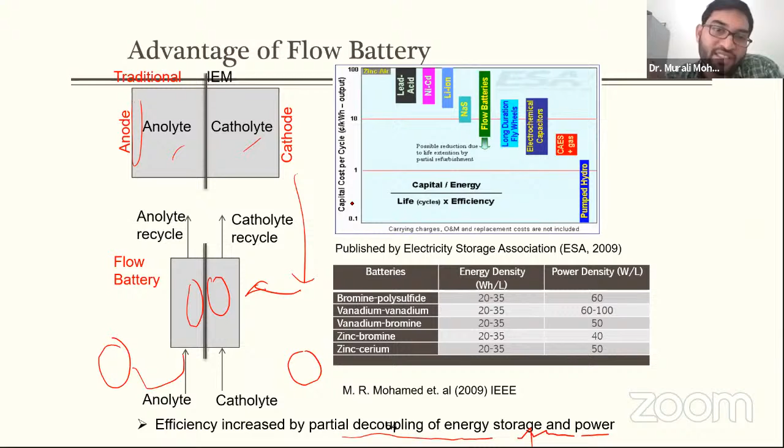So most of my work focused on different areas within the flow battery also - there is the electrolyte part, electrode part, and membrane part. Electrolyte work involved vanadium ion solubility in H2SO4. And for electrodes, there are different electrodes to minimize gas evolution and increase efficiency.

But I chose the membrane - stability, selectivity, and conductivity of ion. I worked in this area and successfully developed 3 different membranes.

You can see those publications online also, from my PhD, and one more publication after graduation, after taking the degree, I meant to write that paper actually.

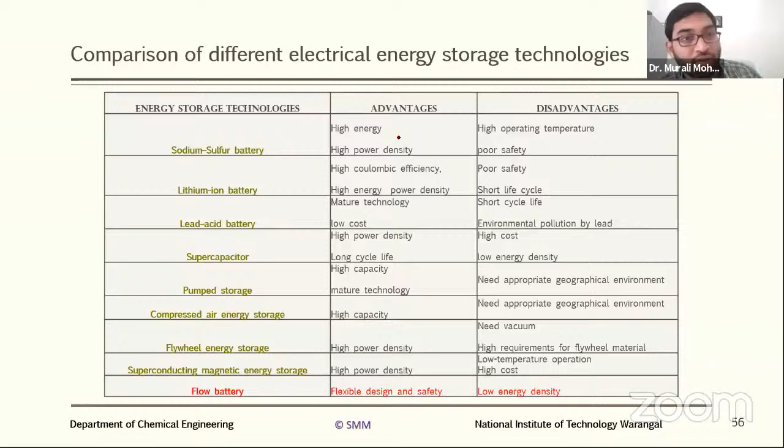Commercially, we can see some installations also. At the end of the slide, I will show the installation, how much power we are producing, how much power we are storing and giving back with this flow battery chemistry.

There are excellent review articles on flow batteries available online. You can just type 'flow batteries' and find the literature. These review papers give good insights into flow battery technology.

Coming to the history, it started in the 19th century, with development taking place in the 20th century, and now we are moving to the 21st century. The first flow battery was invented by French scientist Charles Renard in 1884, but his invention was forgotten for many years. It was revived by German scientist Walter Kango in 1954, so it was invented in the 19th century but reinvented in the 20th century.

After that, NASA took up this project. The flow battery was undertaken by NASA in 1973, and there have been many advancements since. I will give you the year-wise goals of NASA and how they explored flow battery chemistry.

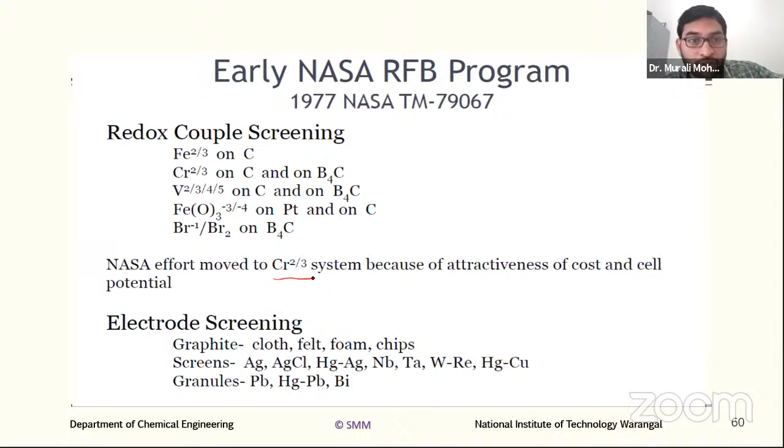When they screened electrodes, they tried different types like cloth, felt, carbon felt, foam type, and chips. These are all electrode types they explored. The different types of electrodes were explored, and these are the milestones given by NASA.

Later work in 1980 and 1982 involved cell stacks and integration with solar cells. They integrated solar cells with redox flow batteries, along with cost prediction, optimization, pumping losses, shunt current, work with mixed reactants, and elevated temperatures to improve efficiency. All these studies took place at NASA.

So how does it look? It looks the same as the components I already explained in the fuel cell, with the same components, but what is put inside the feed is different, and the reactions are different. Except for that, everything is the same. I will explain the differences and compare the fuel cell and flow battery.

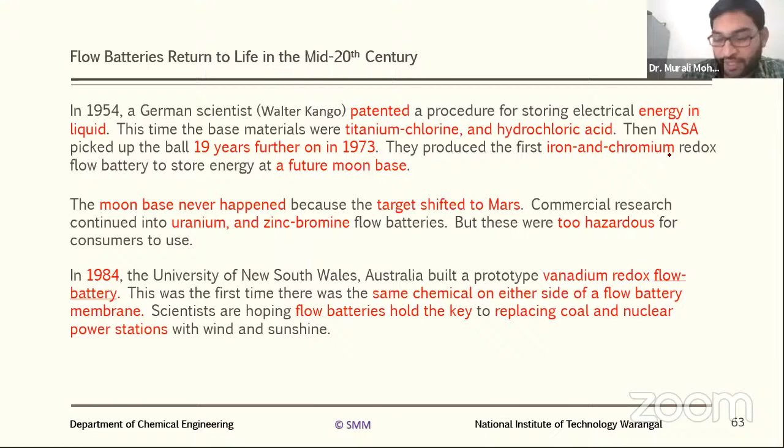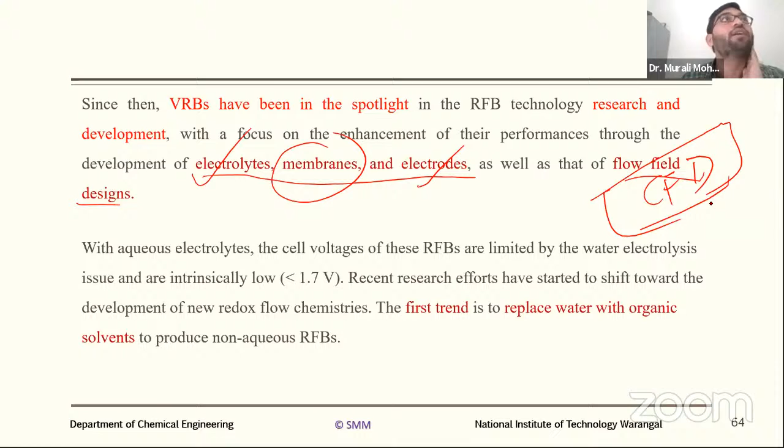There, more information is available. People are working in different areas.

That's all. Here extra infrastructure of hydrogen storage is required. Here extra tanks, outside tanks are required for storing the electrolytes. This is the redox flow battery - there is a storage tank for storing the electrolyte.

Anode side electrolyte is called anolyte, and cathode side electrolyte is catholyte. So they are pumped into the cell. The half-cell reactions take place, and the active material is converted into another oxidation state and stores the energy. When the reverse reaction happens, then the stored energy will be generated back. So this is the chemistry.

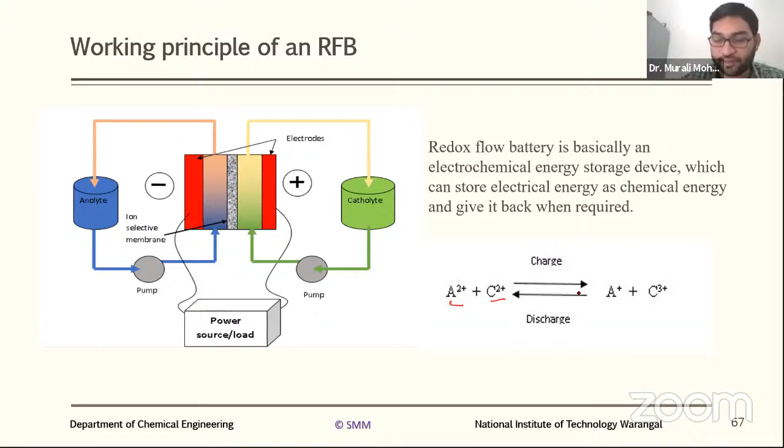This is the anode, this is the cathode, having different oxidation states. On charge, 2+ is reduced to 1+ at the anode, and at the cathode side 2+ is oxidized to 3+. On discharge the reverse reaction happens, and that generates your electricity. This is the charge-discharge cycle basically. So this is how your flow battery looks like.

The flow battery can also be called a regenerative fuel cell, because one time it is charging, taking electricity, and the other time it is giving the electricity back. The components are more or less like a fuel cell only - only the reaction chemistry inside is different.

So the flow battery is an electrochemical device that converts the chemical energy in electroactive materials directly into electrical energy.

This redox flow battery comprises two parts connected through pumps. The flow cell consists of two parallel electrodes separated by an ion exchange membrane, forming two electrolyte chambers - one is the anolyte chamber and the other the catholyte chamber. These are the two half-cells. Separate electrolyte solutions containing electroactive material circulate through each compartment from independent electrolyte circuits. Two circuits are running here, unlike the fuel cell - one is the anode side circuit and another is the cathode side circuit. Two different reactions take place at the anode side and cathode side.

So electroactive material is very important - that dissolution of electroactive material inside the electrolyte, which may be acid or some other electrolyte. We have to dissolve the electroactive material which really participates in the reaction.

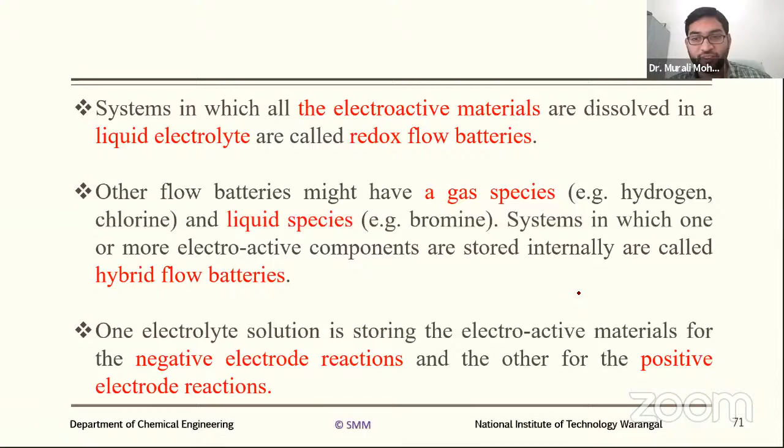This is all explained: at the negative electrode, what reaction takes place, and at the cathode, what reaction is taking place. As in the fuel cell, the electron is passed to the external circuit and the ion is passed to the internal circuit to close the circuit. Otherwise, the charge and discharge won't happen in the flow battery either.

If we take one single example, I'll explain all these points in the figure. See this vanadium redox flow battery. What is happening? This is the charge cycle. Focus on this charge cycle only. When we are charging, meaning when we are pumping electricity into the battery, V4 is oxidized. Before that, when we are pumping the electricity, electrons are pumped inside, right?

The electron is taken here, and V3 is reduced to V2. Reduction takes place. V3 is reduced to V2, and here oxidation takes place: V4 is oxidized to V5. In this form, when we are charging, the active material in one half cell is oxidized, and in the other half cell it is reduced. The active materials are now all converted into different oxidation states.

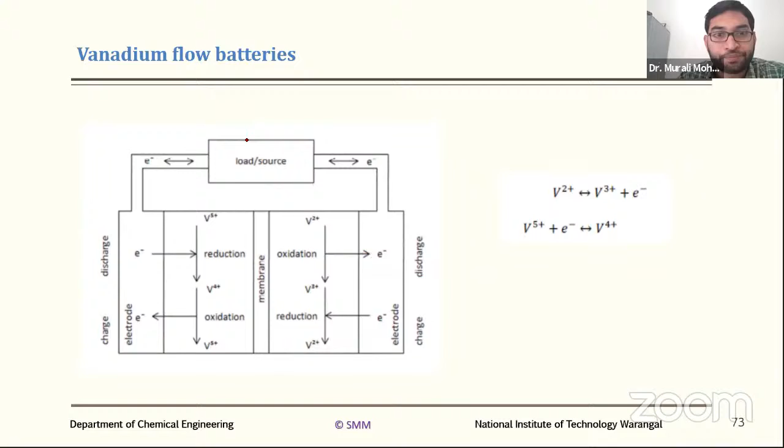These two are combined here into a hybrid battery, vanadium and ferrous, which gives 1.02 volts. It has its own advantages. This is called a hybrid battery. From the all vanadium flow battery they have taken one redox couple, and from the iron chromium battery they have taken another redox couple, and combined them to make a hybrid flow battery.

Research is going on. Based on the active material, the cost of the battery is increasing, so they want to decrease the cost. The US Department of Energy has also set targets. Research is going on to reduce the cost of the flow battery, mainly the cost of the electrolyte. So they want to shift into quinone based flow battery chemistry, using anthraquinone based electrolytes. These are called organic flow batteries. You can explore more about organic flow batteries for more insights.

Finally, the performance is calculated: in the charge cycle, how much average voltage is maintained, and in the discharge cycle, how much average is maintained. V discharge by V charge is called voltage efficiency. Same way, we get how much charge is maintained while charging and discharging, that is Q discharge by Q charge. This is called Coulombic efficiency, and Coulombic efficiency times voltage efficiency is energy efficiency.

When we talk about flow batteries, how much energy efficiency is maintained is a very important parameter. When we multiply the Coulombic efficiency with the voltage efficiency, we get this energy efficiency.